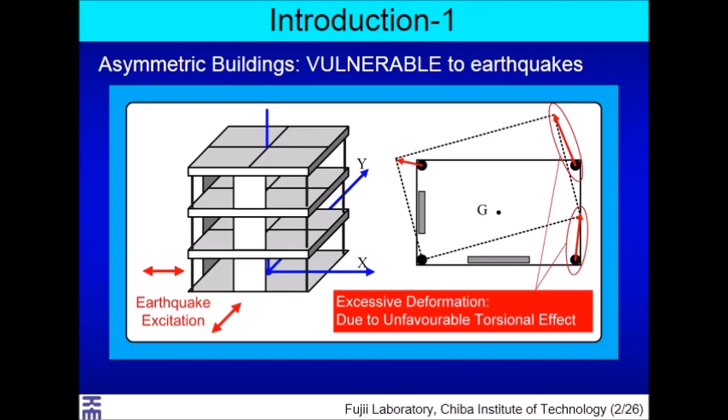It is well known that asymmetric buildings are vulnerable to earthquakes. This is because excessive deformation occurs at the corner columns due to unfavorable torsional effect, which leads to premature failure of members and collapse of the whole building.

For the seismic rehabilitation of asymmetric buildings, using energy dissipative dampers is one promising choice. From past analytical studies, it has been shown that the unfavorable torsional effect can be reduced by installing hysteresis or viscous dampers. However, there are some problems.

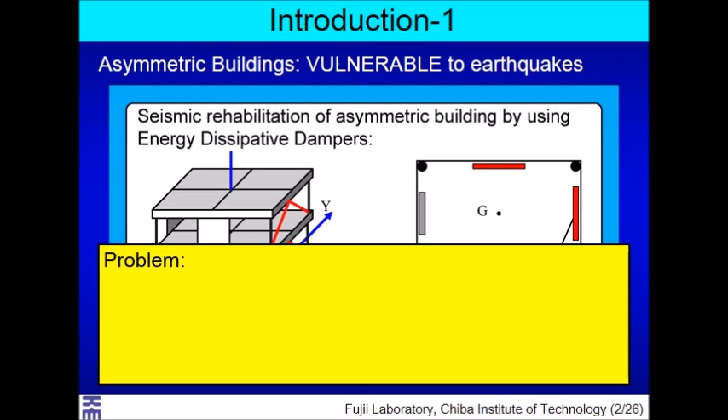One problem is that in most past studies, asymmetric buildings are assumed to have linear elastic behavior. So more investigation on the nonlinear behavior of asymmetric buildings with dampers is needed.

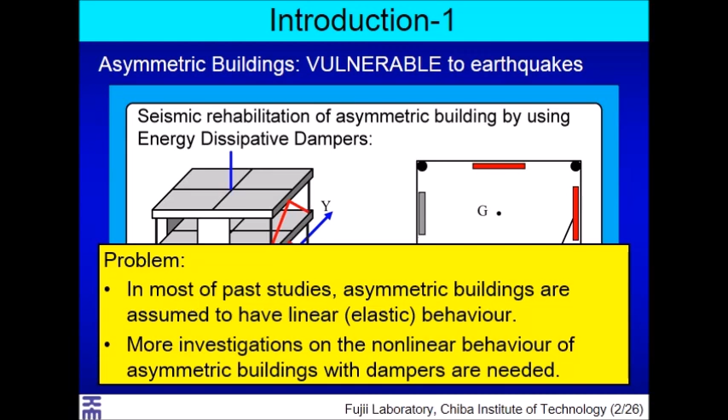In recent years, the pushover-based simplified nonlinear analysis procedure, often referred to as the nonlinear static procedure, has been extended to asymmetric buildings by some researchers. It would be valuable if these extended versions were applicable to asymmetric buildings with dampers.

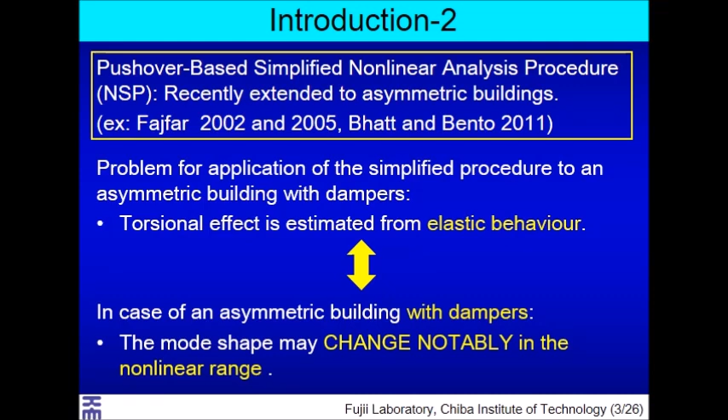However, there are problems. One critical problem is that in most of these studies, torsional effect is estimated from elastic behavior. In case of asymmetric buildings with dampers, especially reinforced concrete buildings with hysteresis dampers, the mode shape may change notably in the nonlinear range. So the estimation of torsional effect based on linear elastic behavior would lead to notable error in case of asymmetric buildings with dampers.

In 2014, the author proposed a simplified procedure to predict the largest peak seismic response of asymmetric buildings subjected to horizontal bidirectional ground motion acting at an arbitrary angle of incidence, presented in the Bulletin of Earthquake Engineering. This proposed procedure is one of the extended versions of the nonlinear static procedure, and it considers the effect of the change in mode shape and bidirectional excitation.

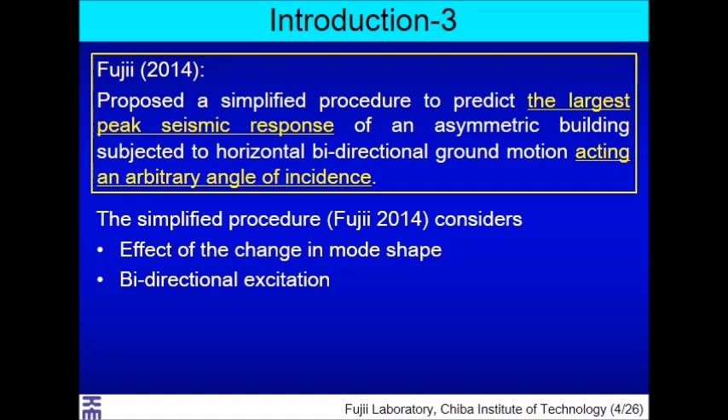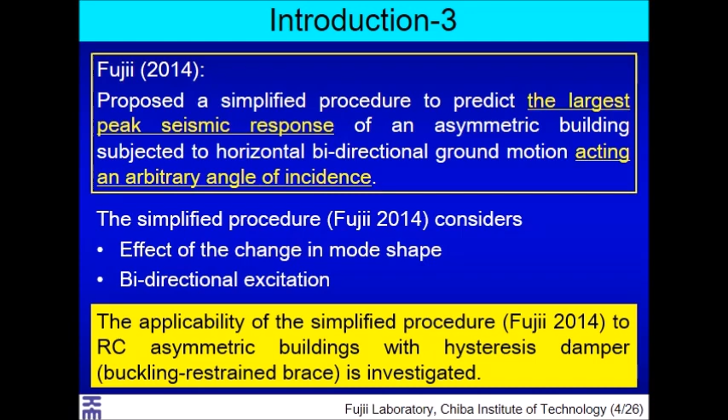So this procedure has promise for application to asymmetric buildings with dampers. In this presentation, the applicability of the simplified procedure to reinforced concrete asymmetric buildings with hysteresis dampers is investigated.

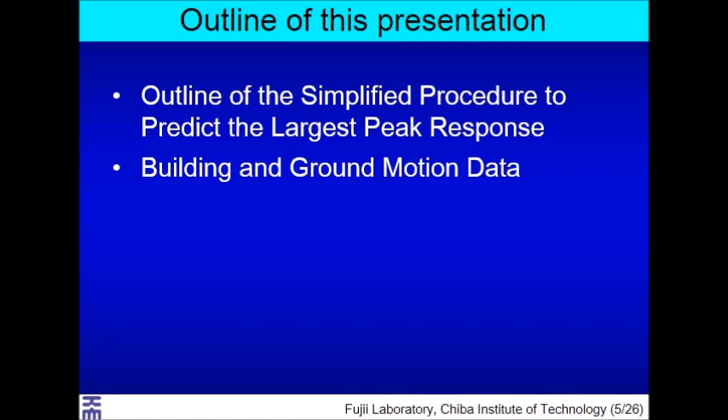Here shows the outline of this presentation. In the first part, the outline of the simplified procedure to predict the largest peak response is explained. In the second part, the building and ground motion data are shown. In the third part, comparisons of the predicted results with time history analysis results are made, and the accuracy of the simplified procedure in case of asymmetric buildings with and without dampers are discussed.

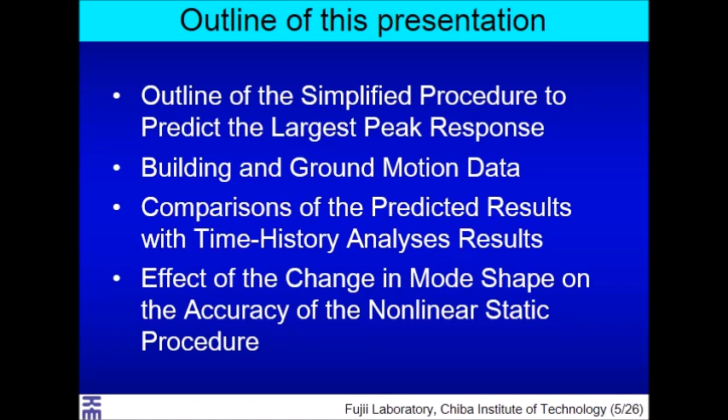This simplified procedure consists of 5 steps. In step 1, pushover analysis of a frame model is carried out to obtain the force displacement relationship representing the first mode response. In this pushover analysis, the change in the first mode shape is considered.

In this study, the displacement-based mode adaptive pushover analysis, developed by the author, is carried out, and then the property of the equivalent single degree of freedom model representing the first mode response is determined.

Note that the direction of seismic input considering the first mode response, referred to as the principal direction of the first mode response, is determined based on the first mode shape in each step.

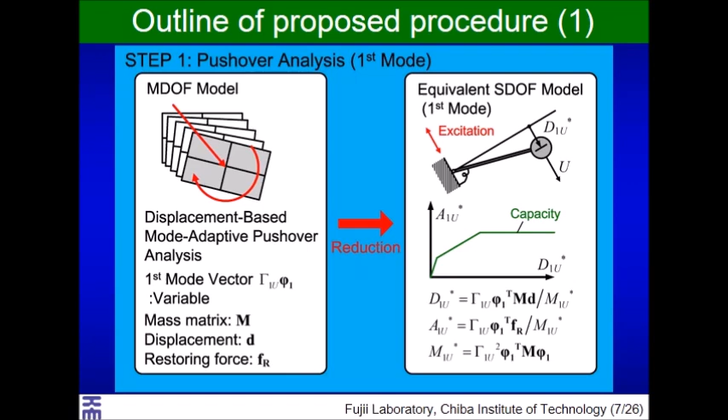In step 2, the peak response of the equivalent single degree of freedom model representing the first mode response is predicted by the equivalent linearization technique. As shown here, the intersection point of the capacity curve and demand curve represents the predicted peak response.

In step 3, another pushover analysis is carried out to obtain the force displacement relationship representing the second mode response. Based on the results of steps 1 and 2, the second mode vector is determined in terms of the first mode vector at the predicted peak response of the first mode.

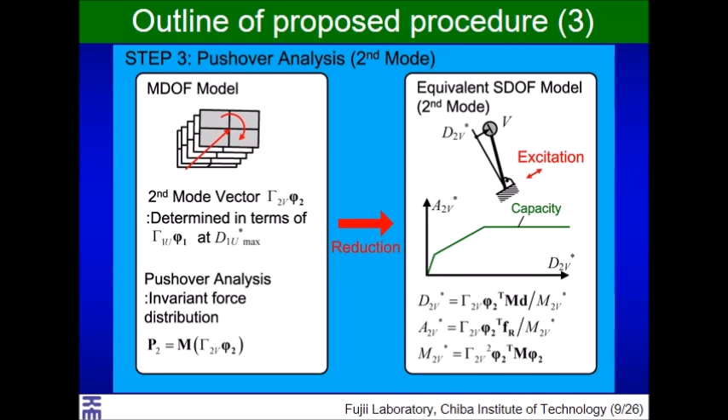From this result, the property of the equivalent single degree of freedom model representing the second mode response is determined. In step 4, the peak response of this equivalent single degree of freedom model is predicted by the equivalent linearization technique.

Note that as the demand curve, the response spectrum of the major component is used, the same as in step 2.

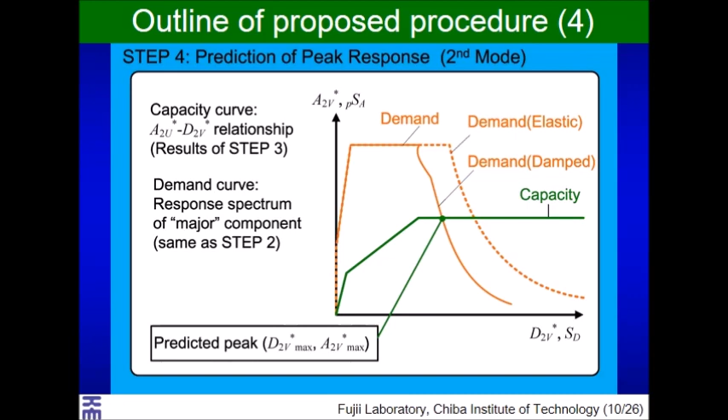In step 5, the largest peak response at each frame is predicted by the combination of 4 pushover analyses. From the results of steps 2 and 4, 4 combined force distributions are determined by these equations. Then the 4 pushover analyses are carried out. The predicted largest peak responses are obtained as the envelope of the 4 pushover analysis results.

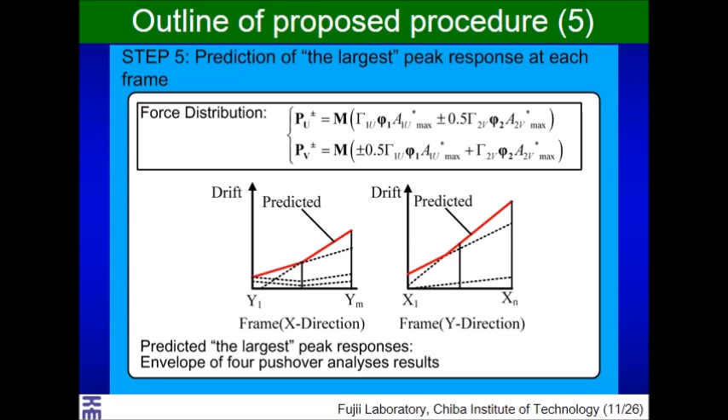Next, the buildings and ground motion data is explained in detail.

In this presentation, the results of two building models are shown.

One building is model O, the model without dampers. This is a 4-story building model with bidirectional eccentricity. Each frame structure is designed according to strong column weak beam concept, and sufficient shear reinforcement is provided to all members to prevent shear failure.

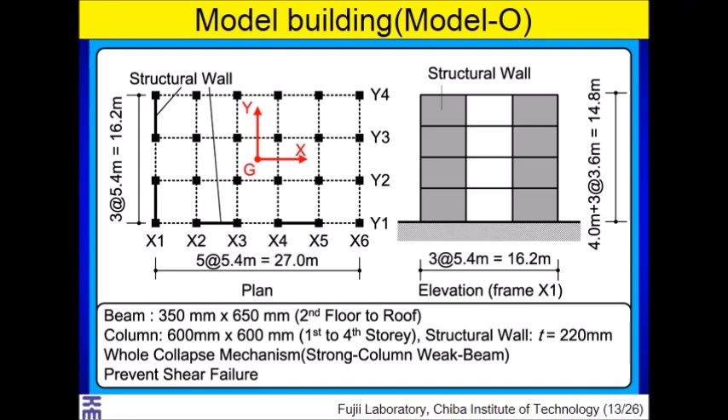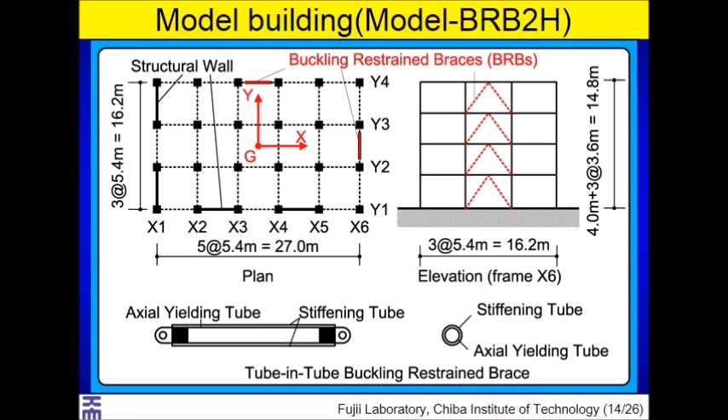Another building model shown in this presentation is model BRB2H, the model with buckling-restrained braces in frames Y4 and X6. In these frames, the same buckling-restrained braces are installed. In this study, the tube-in-tube buckling-restrained braces are used.

In this study, the seismic excitation was considered as bidirectional in the XY plane, and 3 sets of artificial ground motions are generated. The shapes of the target spectrum are assumed to be the same in both major and minor components.

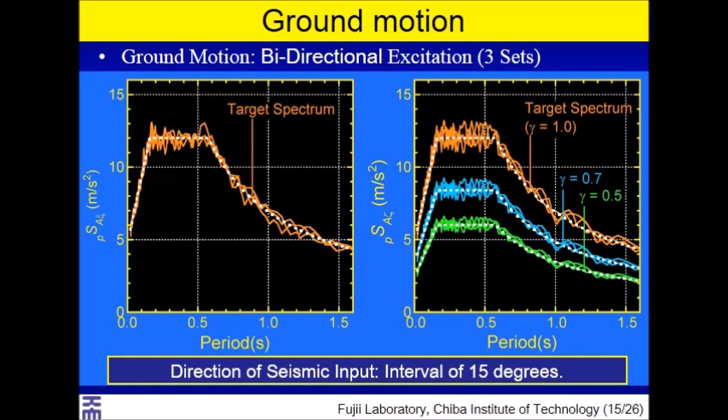The target spectrum of the minor component is reduced by the parameter gamma. Here the parameter is set to 0, 0.5, 0.7 and 1.0. The direction of seismic input varies with an interval of 15 degrees.

Next, the predicted largest peak response is compared with the time history analysis results. The predicted results are compared with the envelope of dynamic analysis of various directions of seismic input in case of gamma equals 0, 0.5 and 0.7, while in case of gamma equals 1.0, the average of dynamic analysis results are compared to the predicted results.

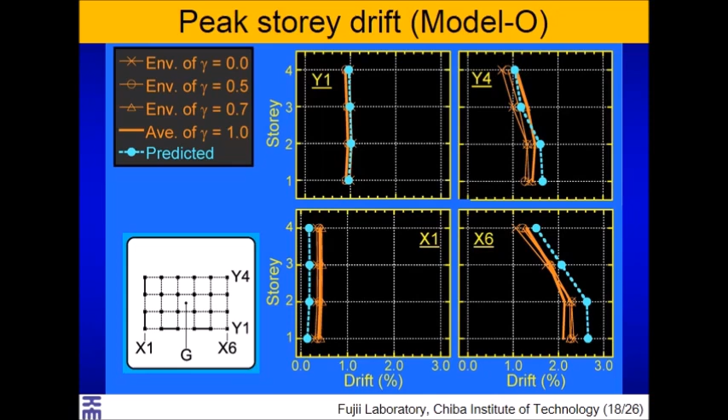This figure shows the comparisons of the story drift at frames Y1, Y4, X1, and X6. As is shown here, the predicted peak story drift agrees with the upper bound of the dynamic analysis except frame X1.

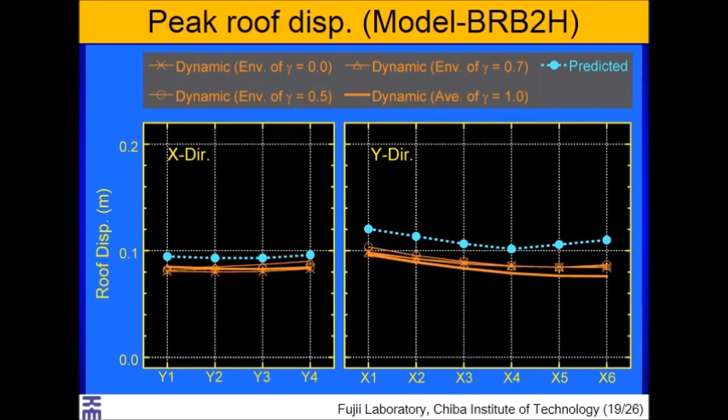Next, I would like to show you the results of the asymmetric building model with dampers. This figure shows the comparisons of the peak roof displacement obtained from dynamic analysis and simplified procedure. As is shown here, the distribution of the predicted peak response at roof approximates the upper bound of the dynamic analysis results.

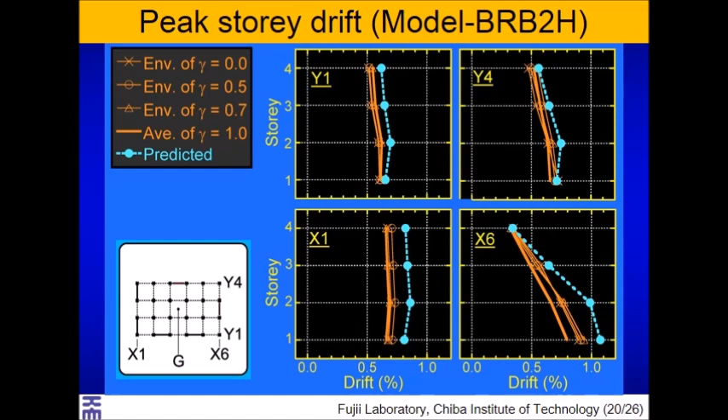From this result, the simplified procedure can be applicable to asymmetric buildings with hysteretic dampers as well as those without dampers. Next, the effect of the change in mode shape on accuracy of the nonlinear static procedure is discussed based on the results of two building models.

In this part, another prediction is made by using invariant mode shape. In other words, the peak response is predicted by using elastic first and second modes.

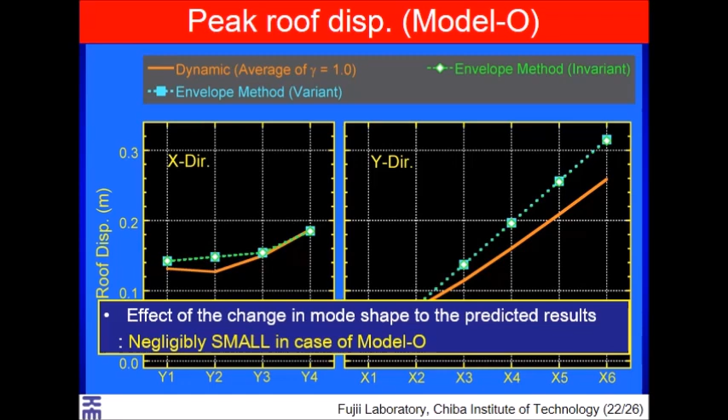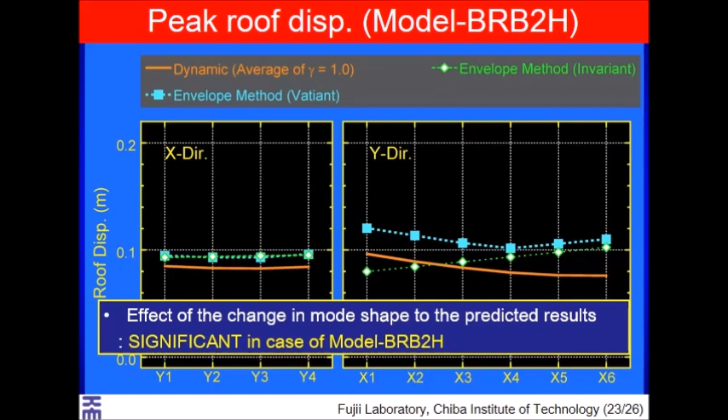The predicted results underestimate the response at frame X1 in case of invariant mode shape.

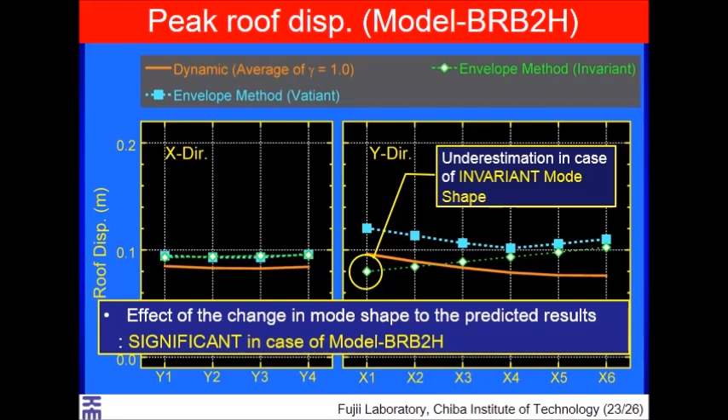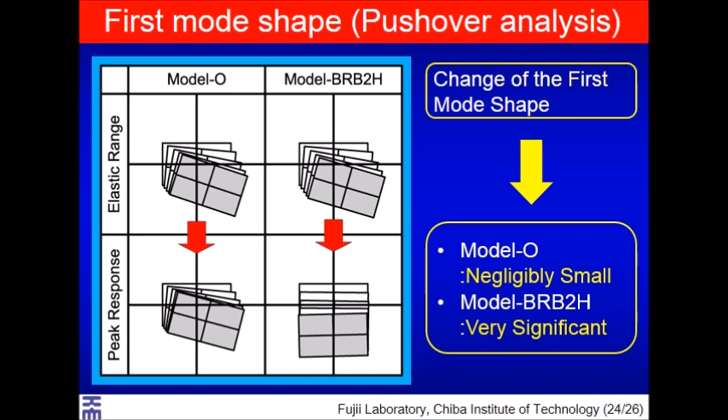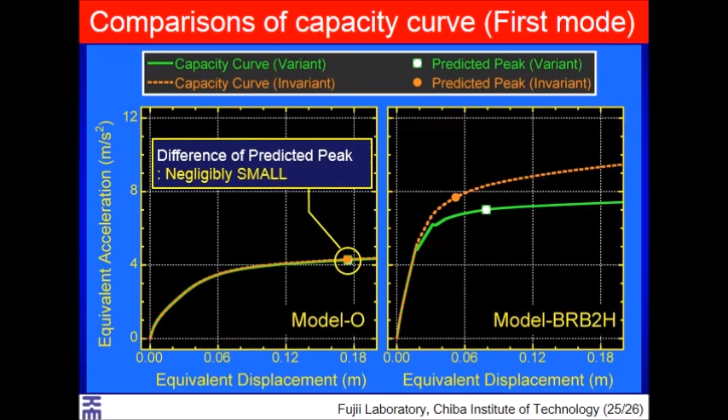Here shows the comparisons of the property of equivalent single degree of freedom model representing the first mode response. The comparisons of capacity curve of model O is shown on the left and that of model BRB2H is shown on the right. As is shown here, the difference of the predicted results is negligibly small in case of model O, the model without dampers.

On the contrary, the difference of the predicted peak is significant in case of model BRB2H, the model with dampers.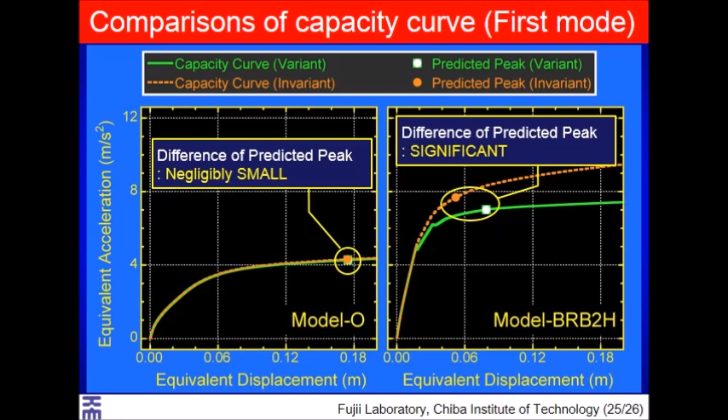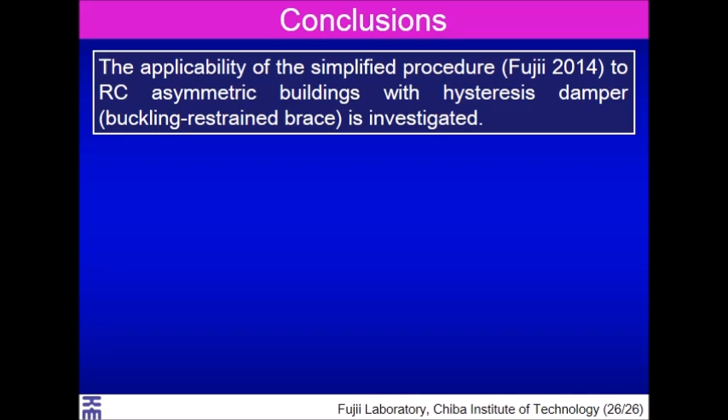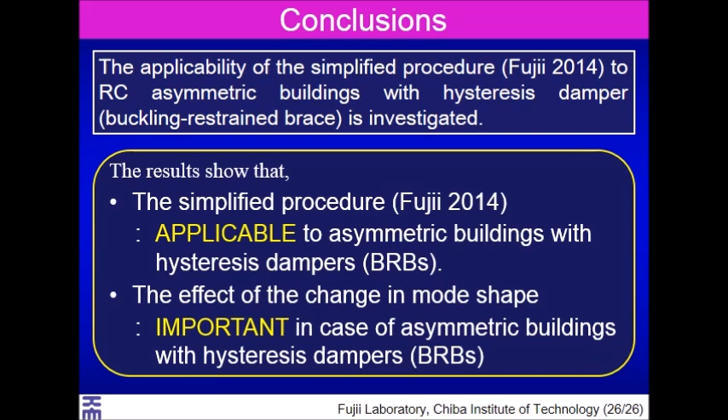In this presentation, the applicability of the simplified procedure to reinforced concrete asymmetric buildings with hysteresis damper is investigated. The results show that the simplified procedure presented by the author is applicable to asymmetric buildings with hysteresis damper, and the effect of the change in mode shape may be important in case of asymmetric buildings with hysteresis dampers.